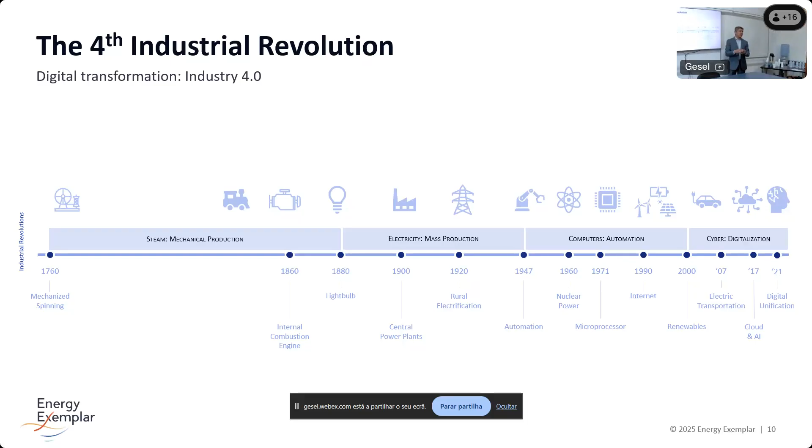Any country or any economy you go to today, most of the discussions are taking place around AI, cybersecurity and digital transformation. And electricity is at the core of all that transformation. So electricity is playing a major role in that.

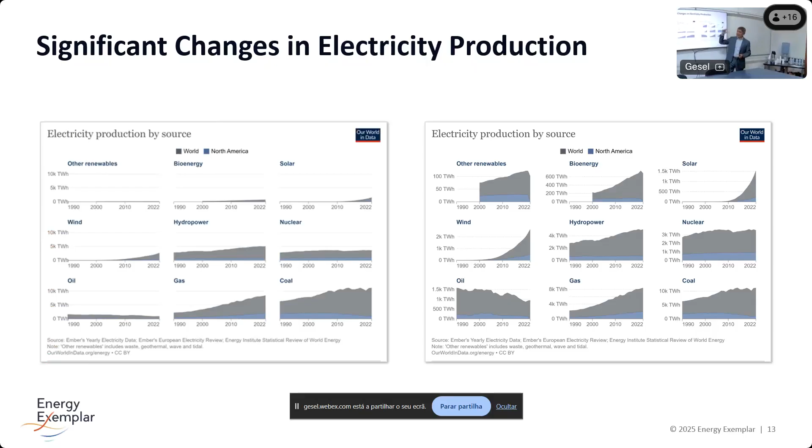And that's why every market that you go globally, people are considering what else do we need to do to accelerate the pace of transformation. And that's bringing major changes from a regulatory point of view, technology, and operations.

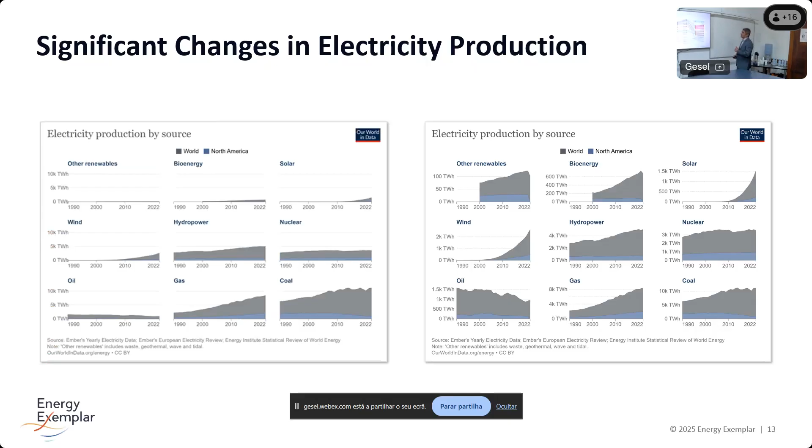So almost 90% of the energy that we use is wasted, either through heat losses and other kind of transformation changes. That's why the electrification makes a lot of sense if we want to improve the efficiency of the energy uses. But we can see how we waste a lot of energy.

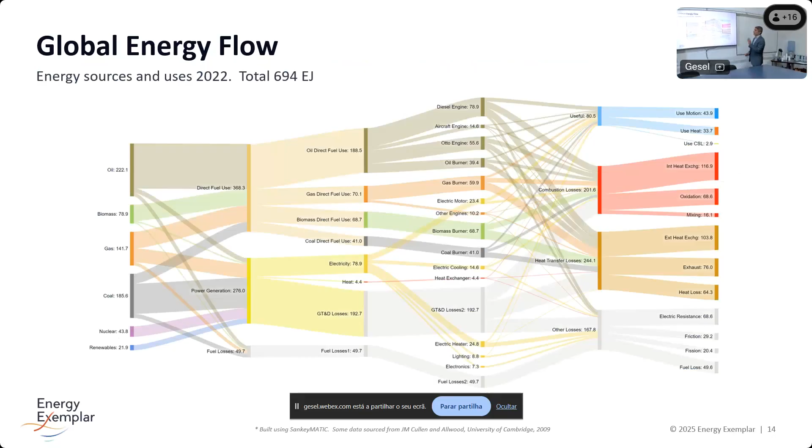So when we talk about energy transition, we need to not only consider that we want to decarbonize, we need to make sure that we make better use of the energy sources. What is the best and most optimal transformation that we can make of our energy sources in order to improve what we're currently doing?

So if you are in Europe, or you are in a Caribbean island or an island in the Southeast Pacific, this is a big issue for you. Energy security, you don't know where the energy is going to come from. If you are in North America, for example, electric reliability is the major impact in your system today, as well as the infrastructure for decarbonization. Transmission is the major issue today in North America.

If you go to other latitudes like Brazil, Colombia, Central America, other countries, extreme weather events are playing a major role in what we're doing, as well as regulatory changes and energy cost increases. So depending on your region, it will have more or less of these consequences.

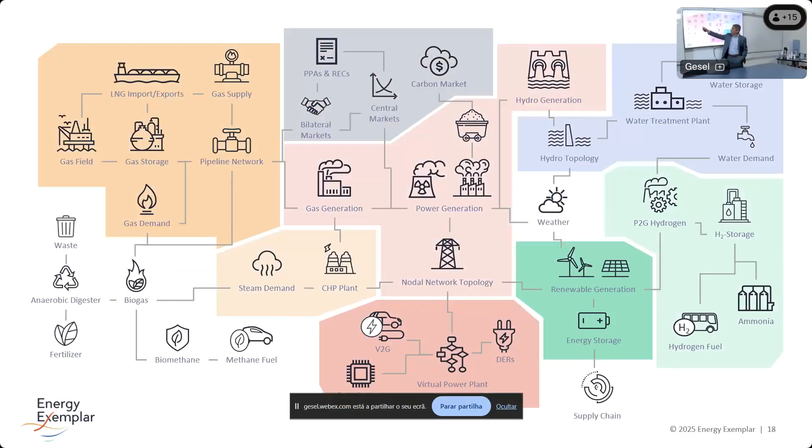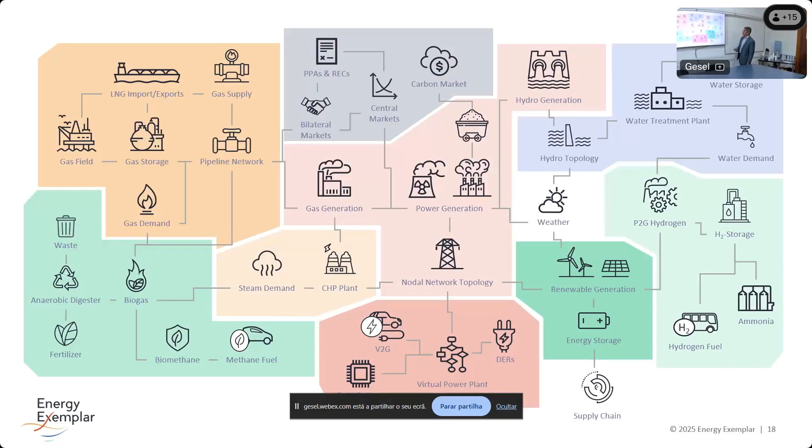So when we mean multi-commodity, we truly mean that. Not only, for example, when we say gas as a source for power generation, but modeling the entire gas supply from exploration to transportation to pipelines to storage to gas demand. When we talk about electricity, it's all forms of electricity. When we talk about hydro, it's not just hydro for generation, but hydro as an aqueduct system, irrigation, different kinds of water treatment plants, complete hydro topology to be able to model your hydro energy and so forth. Hydrogen with all its components and intrinsic modeling with the rest of the system, renewable projects, energy storage, and hybrid projects that you can configure in PLEXOS, including things like supply chain.

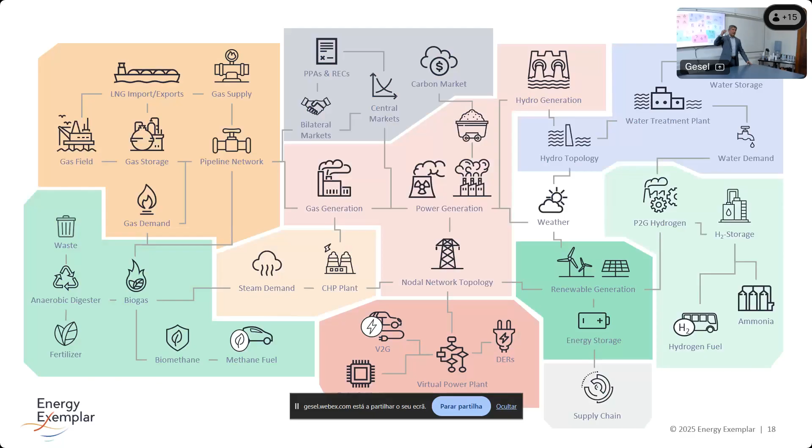In North America, and I know this is true in many parts of the world, today you cannot file an expansion plan if you haven't secured your supply chain. Supply chain also has an important component in that, depending on where the materials and assets come from, the country of origin, you may or may not have certain tariffs and certain incentives. So if you're going to put a solar panel in, but most of the components come from China, then you're going to have heavy tariffs and your risk is pretty high.

But if the components come from another country, then you're probably going to get an incentive to buy from there. So when people are doing the modeling, PLEXOS not only allows them to understand whether this is the best electric or energy project to put in the market, it's also looking at the supply chain and saying, hold on a second, if you buy from these sources or these countries, you're going to have these challenges and these risks. That's the kind of thing PLEXOS can do for you. So you can model all these elements together or separate, whichever you want.

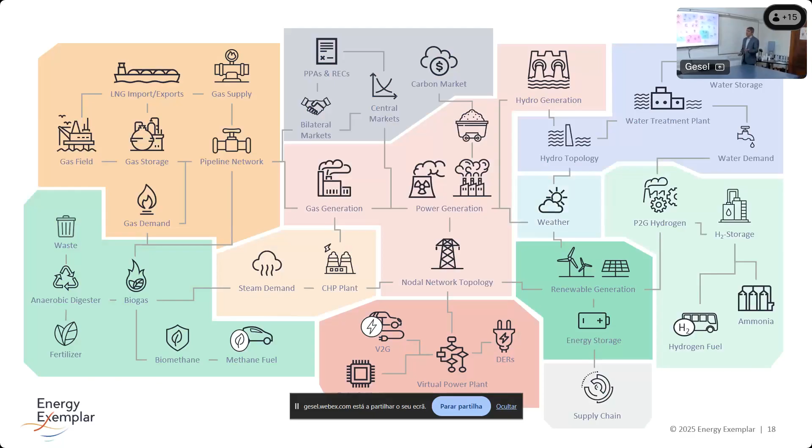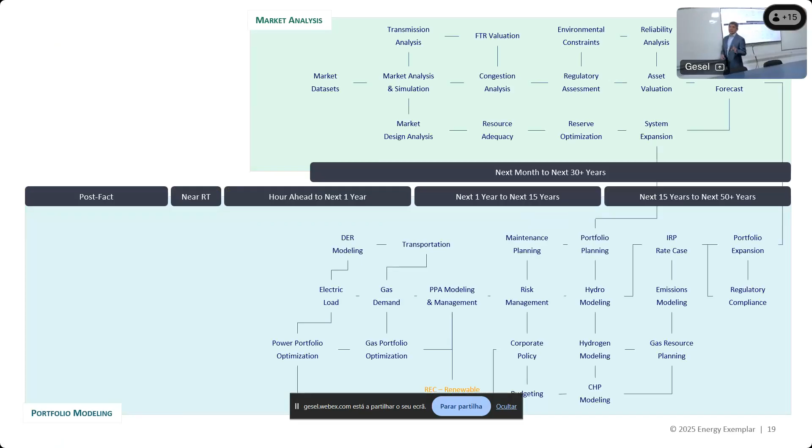And last, I'm not going to go through the details of this slide, but we can certainly schedule a follow-up time to go over this. This is an example of the different use cases people have for PLEXOS globally. Obviously, depending on the region, territory, and market, they may or may not do all of these things. But one, you can use PLEXOS to do market analysis.

So you can use PLEXOS to say, I want to see what's going to happen in Brazil. If this nuclear power plant is repowered and they increase capacity by 10%, what's going to be the impact on prices? What's going to be the impact on transmission congestion? What's going to be the impact on reliability and so forth? If this hydro project has, for example, bad hydrology or inflows over the next two years, what's going to be the impact on prices, on reliability, on reserves? If the government brings up certain regulatory changes, what's going to be the impact? So you can use PLEXOS to do an analysis of the Brazilian market.

But then you can also use PLEXOS to do your own portfolio analysis. So if you have your own assets, how much do I need to build in the future, and where, and when do I need to build that? What kind of risk policies do I need to put in place to manage my risk, to comply with all my corporate policies, to produce the budget I need to send to upper management, to do maintenance planning, to do PPA modeling, to be able to then, in the shorter term, engage into trading, into optimization of your gas and electric system, bidding into the market. So if you get closer to next day, next hour, next 5 minutes, how do I bid into the market? Then how do I communicate with the market operator?

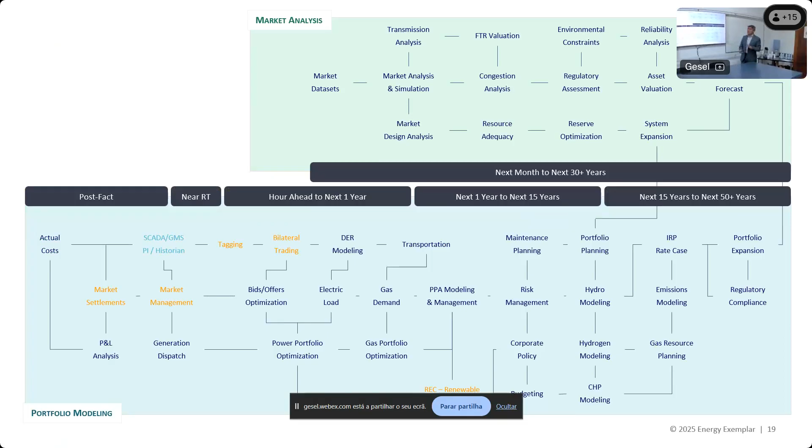And then after the fact, how did we do? So we say this is what we were going to do, and now I want to know how did we do? Did we do well? Did we do bad? So you can do all these use cases within PLEXOS. You can do market analysis in PLEXOS for an entire market or region, and you can also use PLEXOS to model your own portfolio. Same product, but just different configuration that you can do.

And I think this is the last slide. You will see detailed information from Felipe in just about 10 seconds, and you will see that he goes through different user interfaces.

At some point you're going to say, hold on, I thought PLEXOS was one product, but I'm seeing Excel, a web page, and an application that looks like a desktop application. I'm seeing different things, why? Well, the planning process is not linear, done by a single individual. It includes people managing data, analysts developing scenarios, heavy modelers building models in PLEXOS that execute them, business analysts looking at results, middle management doing collaboration and vetting analysis, and higher-ups doing decision making. Each persona has different perspectives and different ways of working with the data.

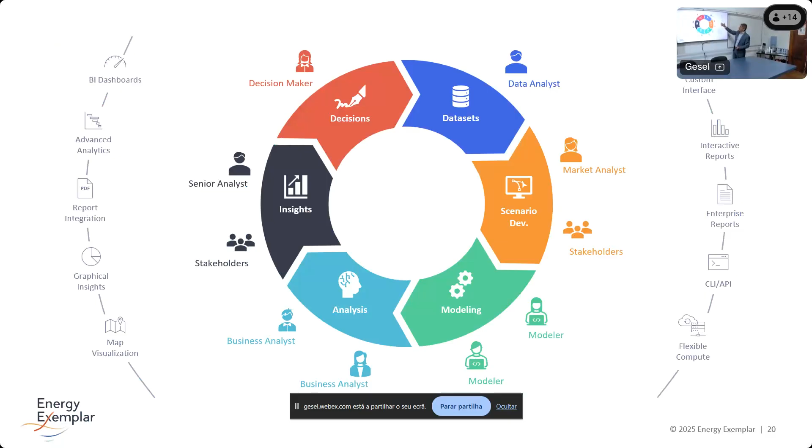You may have people who work better with Microsoft Excel, so you develop an interface on Excel for them. Others work better with command windows and code. Others just want to see BI reports, PDF reports, graphical insights, or mapping visualization. So depending on your role type and what you're doing, you may have different visualizations, and PLEXOS allows you to do that.

Even though it's the same product, you can run PLEXOS from Excel. If you don't like the PLEXOS user interface, you can just use Excel. We have a connector that connects to Excel, and you can query data, manipulate data, and run PLEXOS from Excel. If you prefer the web interface, you can do that. If you want to work off your laptop, you can use the desktop. So it's the same product, same everything, but different visualization depending on your role type.

With that, if there are any questions, please let me know. Otherwise, I think we can get into the meat of the content with Felipe, who is going to give us great insights into PLEXOS. I'll turn it over to you, Felipe.

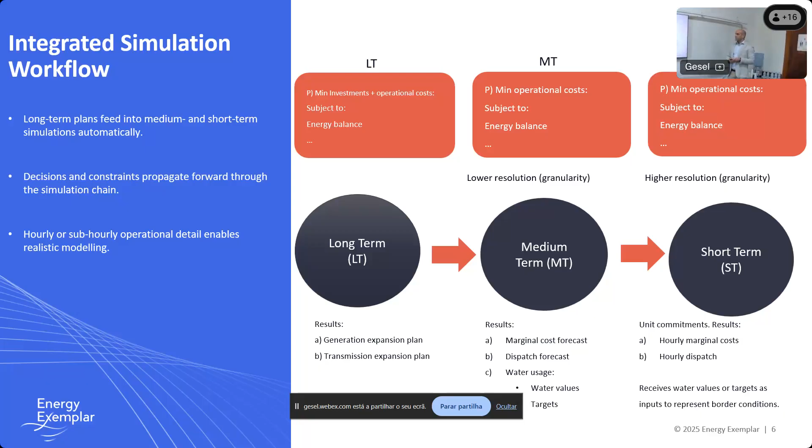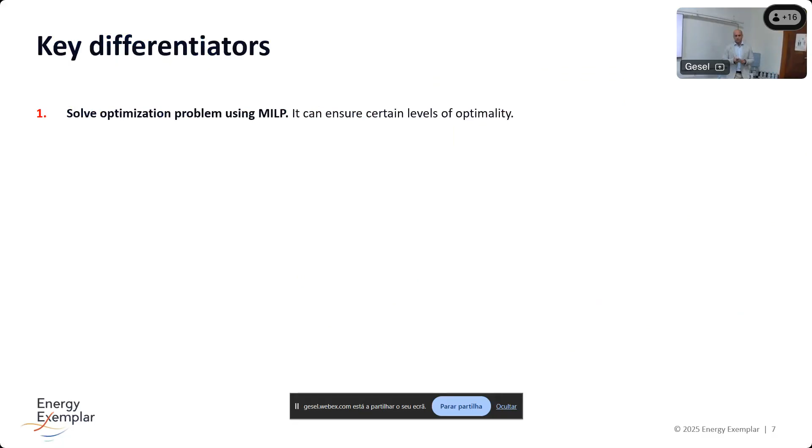A key differentiator of PLEXOS: we use a mathematical method to do this, so we can ensure some degree of optimality. Number two, we co-optimize the problem—you'll see this a lot in our presentations. Co-optimization means in the same optimization problem we solve, for example, reserve and energy, transmission and generation together, so we ensure it's optimal. We don't have the chicken-or-egg problem of which comes first, because we solve the same problem.

Number three is granularity, so we can go from blocks to hour or sub-hour. The reserve modeling can go very deep here—in fact we have a lot of users modeling AGC, primary and secondary reserve, things like that.

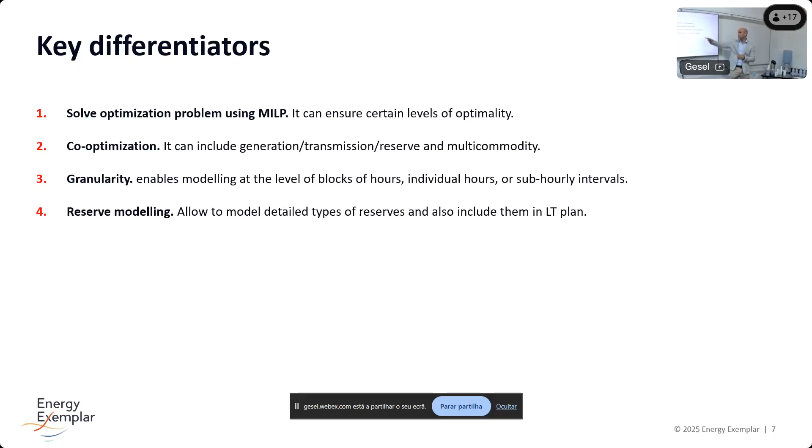Number five, a single engine for all the phases. Number six, we support regional, zonal, and nodal modeling. For nodal, this is very important for markets that have 1,000 nodes.

We have clients using PLEXOS for markets with more than 30,000 nodes. In Latin America our markets are usually less than 1,000 nodes, but in North America, for example, they talk about more than 30,000 nodes. So there's a lot of mathematical methods to simplify the optimal power flow, to make the problem feasible and solvable, especially when you include transmission losses, which is very difficult to model because that's a quadratic problem. How can you simplify that in an optimization problem?

So in those markets, they sometimes use the zonal model a lot—instead of modeling the complete network, you simplify it into one zone.

Number 7 is stochastic optimization. So we can do a scenario analysis, which is perfect foresight, Monte Carlo, which is also perfect foresight. And we have also stochastic optimization. We have 2-stage and multi-stage stochastic optimization. Number 8, we can go a mixed temporal resolution, which means in the same problem, you can do very high detail at the beginning, and in the future, maybe you can reduce, you can use blocks. Why we do that? To speed up the problem, to make this faster.

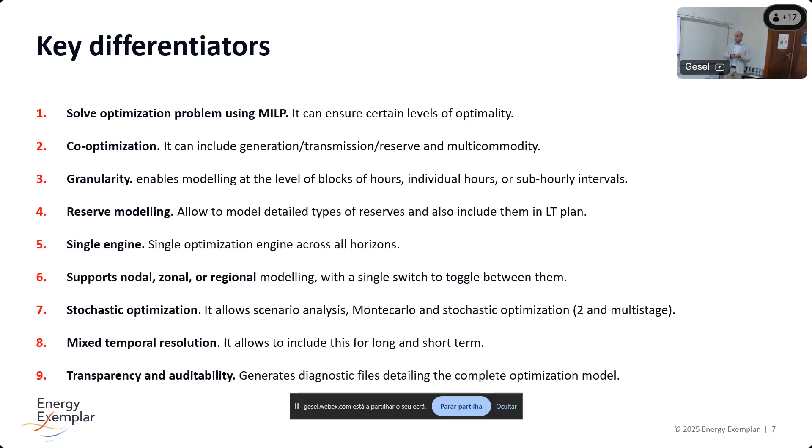So PLEXOS was born as desktop, and in 2019 we added this into the cloud. So you go to the web page, you will see PLEXOS Cloud, and this is the word we use to name PLEXOS. So what are the benefits of this PLEXOS Cloud? Number 1 is a centralized storage in the web. So you have all your models, all your simulation history in the web page.

And this is important as well, the change management and versioning process, because when you work in desktop, you make changes, you save, and then it's not possible to go backwards. So you lose the tracking of the progress. With this, you can see who did the change. When you see the outputs, you can see what is the database linked to the output. So it is very important when you work in a large team. You can track the changes.

You can select the machine. As we go on the next slide, I will show you the machines you can select. We have a map reporting and congestion analysis to analyze where are the congestions. There is a lot of usage of this in nodal markets. In this market with 30,000 nodes, this concept is used a lot. We have Power BI, I will show you some screenshots about this, and Excel add-ins, so you can download this to Excel and then you can use Excel to process the outputs.

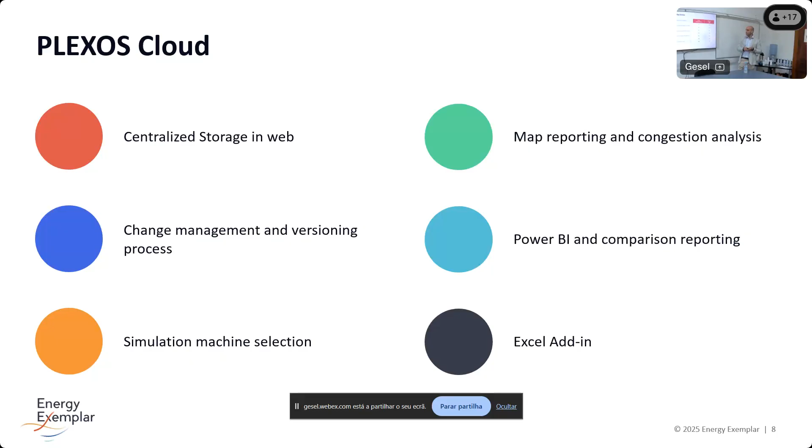So for machine, these are the machines available at the moment. So you can go with a very low spec machine, like 2 cores and 16 RAM, to a very large one. So you have plenty of options. And of course, it's more expensive than this one. So you have a concept of credits. So you consume credits when you use PLEXOS Cloud. There is a question.

So where do we get data for power system data? We don't. No, we don't. We sell databases, but the databases are created from public sources. So, for example, we have a Chilean database. All data in the Chilean power system is public. So we have a database for Peru. Peru is public, so you can download data and then you can use your own database.

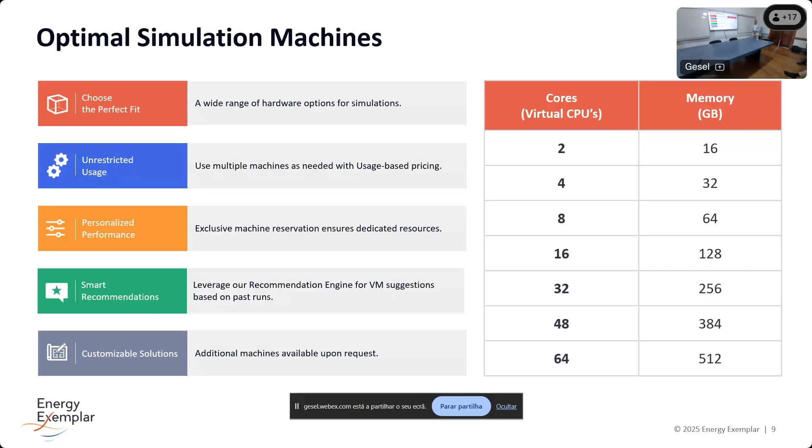Okay, so thank you. Right. So next, okay, this is the second part of the presentation. I will be talking now about the typical use cases. So the first one is expansion planning. I will use this one; the total is 13 for this presentation.

So expansion planning, which is this? You will see this a lot in academic papers. You will see this representation of capacity expansion planning to explain what we do with this chart. Which means if you invest a lot in assets, you will have a higher capital cost and lower production cost, but we try to minimize the net present value of the sum of both.

So this is the total cost, and we try to minimize the net present value, as I said. So what are the features? All the features here about what you can include in the model. So you can include any type of generation technologies, batteries, generation contracts, and so on. You have a lot of options including this type of exercise. In the US, this exercise is called IRP, Integrated Resource Planning. And there's a lot of PLEXOS clients using this space for this type of studies.

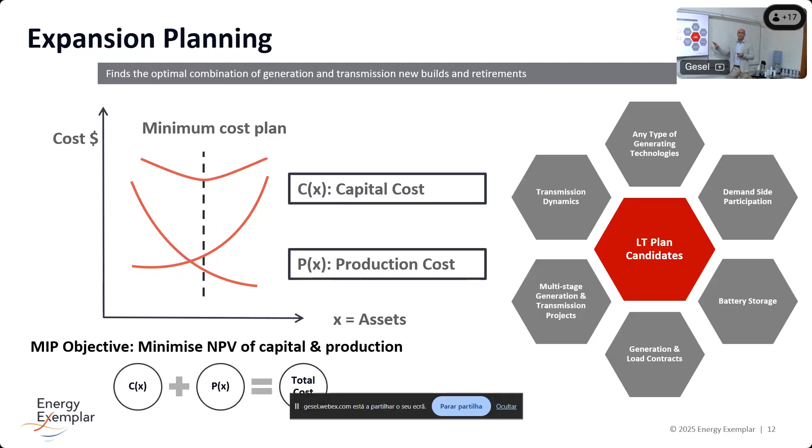And then the main output you can see in the chart here: PLEXOS answers what to build. So here you see, maybe you cannot see at the back, but blue is hydro, orange is gas, green is wind, and yellow is solar. So you can see the investments year by year. So we are trying to answer here when to build, what year, and what type of technology. So we can make sure that it's optimal for the input data.

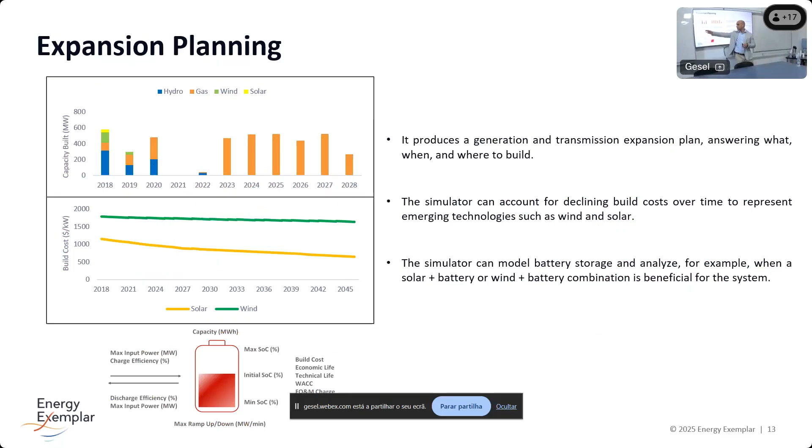Then you can include variable build costs. So in this case, this is an exercise of 2018, but I try to represent the decreasing of the build cost for solar and wind. You can include batteries as well in this type of exercise. So this is number one, expansion planning.

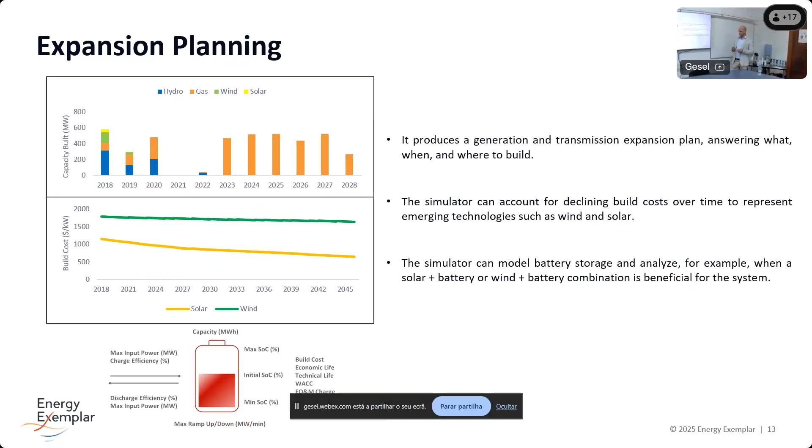So when I told you we have a congestion analysis tool, we try to put in a nice viewer in the cloud how to calculate the congestion charges. In mathematical terms, the sum of energy charge plus congestion charge plus marginal loss charge gives you the total price. Then you can find the three components in the software. So you can report the flows, losses in lines, and all the dynamics of optimal power flow.

One thing, yes. Here in Brazil, we are at the moment discussing the models of pricing of the operation. Today we are by cost, and we are also discussing the offer model as in other countries, some markets in the USA. In this type of model, all the clients have their own models so that they can make the offers, the bids in that market. And how is the feedback of your clients using PLEXOS to compete in these markets?

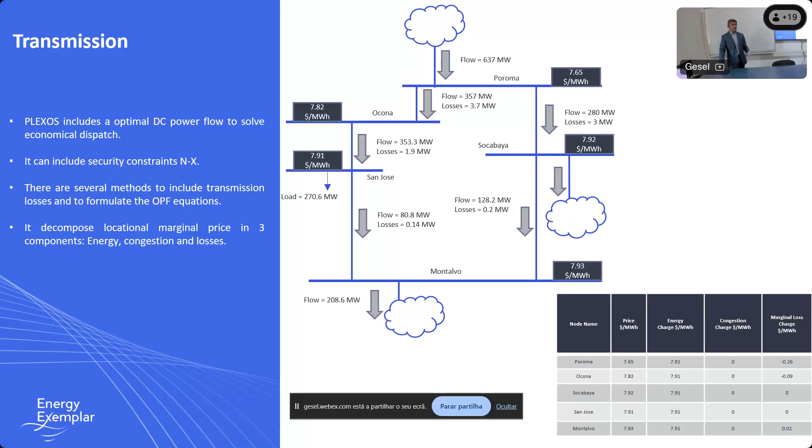So another thing I just remember: it depends on if they have capacity markets or they don't have capacity markets. In the case of the Australian markets, they don't have capacity markets. They don't offer the variable cost. They need to recover something. So people know how much they raise the price above the cost. It's called markup. So they know, oh, these guys bid 3% higher than the variable cost. That is because they need to recover the fixed cost, because they don't have capacity markets.

There's another way. Also, there's a property called markup. So you can input the variable cost and see, okay, let's see what happens if they do a markup of 3% above the variable cost.

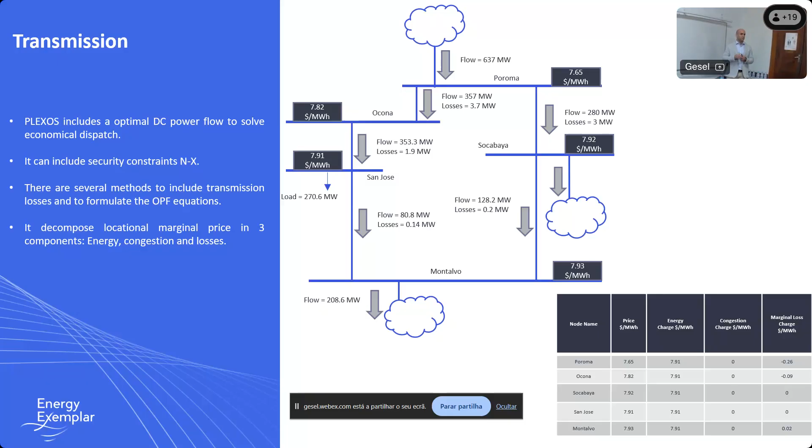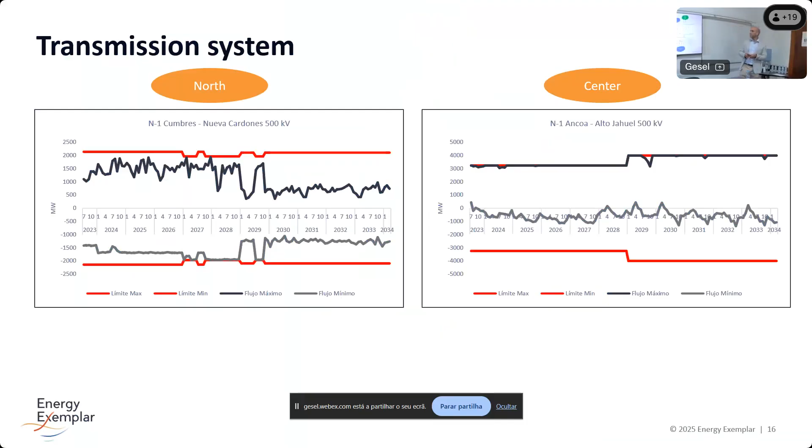And then you can model security constraints, which are very important, because if you have two lines here, this is 3,000, 3,000, it's not possible to send 6,000. So you have n-1. And it's important when you have mesh networks, because we have shift factors. So these limits here are not just the total capacity divided by 2. You have a mesh network. So these constraints are calculated by another software, electrical software, and then you can input the limits in the software.

One important thing is PLEXOS only models active power. We don't include reactive power. It is important because the mathematical problem simplifies a lot. In mathematical terms, it's called DC power flow. In DC power flow, you assume three things. You assume the reactance is higher than the resistance. You assume the angle difference between buses is very small. And you assume the voltage in the buses is 1 per unit. Then you simplify a lot of terms in the nonlinear equations, and you get a linear problem. That's why you can solve a lot of cases using DC power flow. And if you do that, you only model active power. You are not modeling reactive.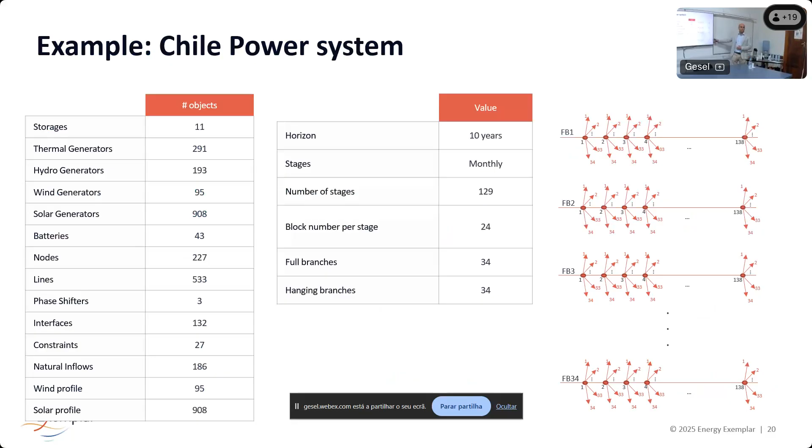And if you include this amount of objects, which is typical for LATAM markets, I have the nodes here. So it's 227, 500 lines. The mathematical size is monthly, 10 years, and we open the branches 34 times per month. So you can model that with PLEXOS. You can use two methodologies. One is called rolling horizon, another one is SDDP. And then you can get a price forecast.

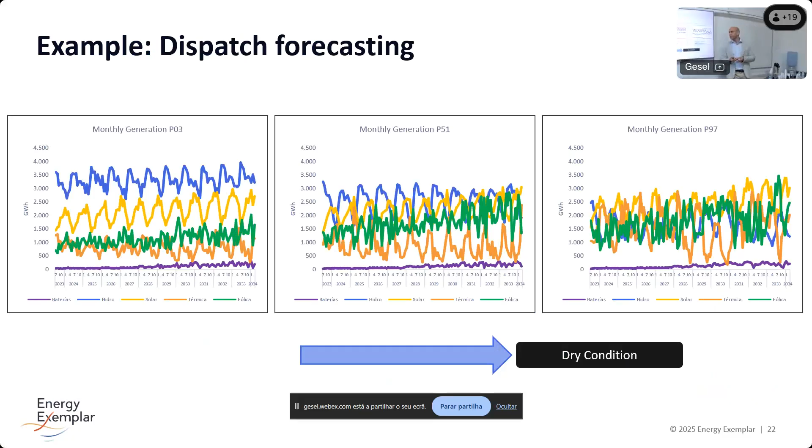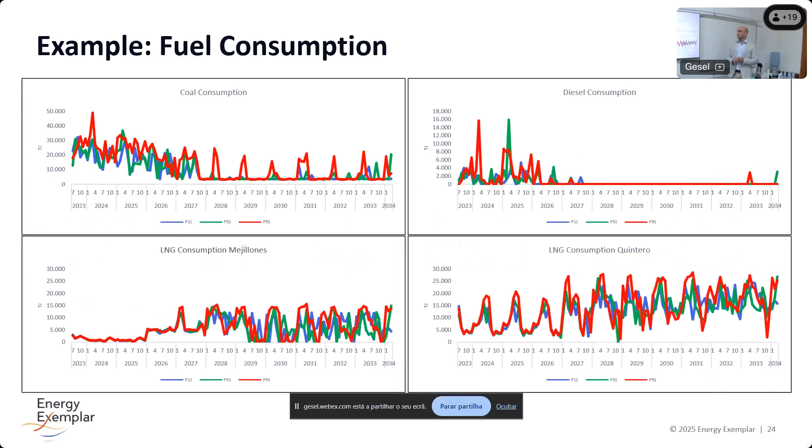And this is something we would like to show you in Brazil. So you can model short-term and long-term. This is an example of hour by hour in 1 week, 6 days. You can check that this is the dispatch. And I grouped this in technologies, and I'm showing you colors. So this is Chile in October 2025. So it's a real case. In Chile, they use PLEXOS for short-term.

So you can see there are a lot of challenges in this system. There is a huge solar penetration. Peak load is about 12,000, and there is a lot of solar during the day, and at night it's nothing. So how do you fill that hole? We have batteries, but batteries are starting at sunset and then it's almost zero. So you need to replace it with thermal, with hydro, and hydro is not as flexible as one can think. Sometimes there are a lot of constraints, irrigation constraints, flow constraints, so it's not possible to ramp up and ramp down in one single day.

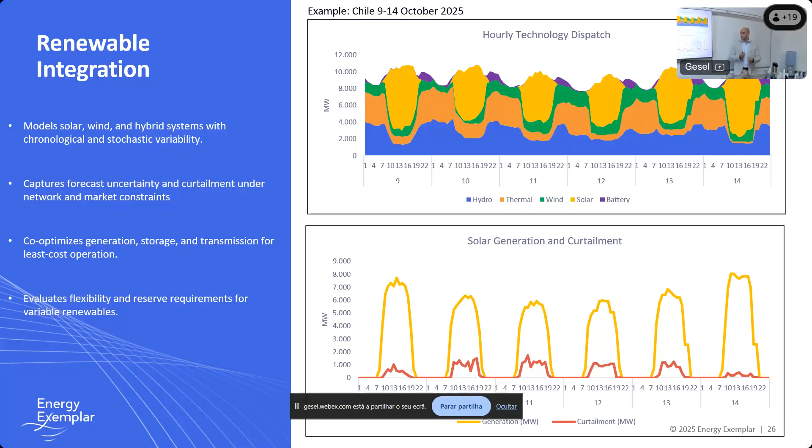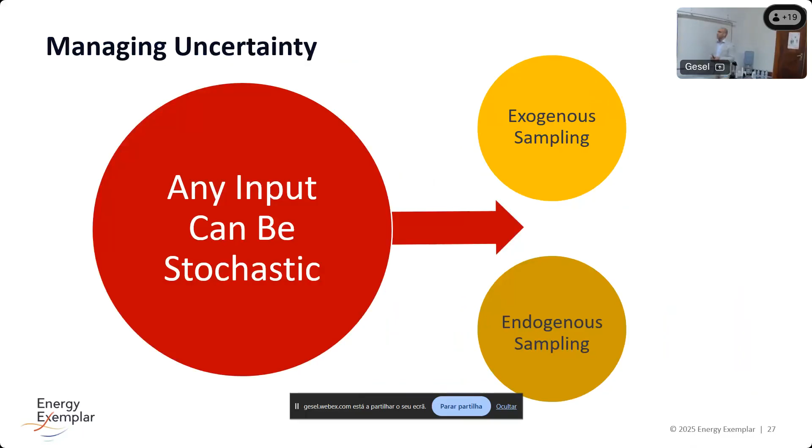Any input can be stochastic. You can read from a CSV. You can create from PLEXOS. It's an example of an ARIMA model I fitted in Peru.

It's very important to put the correlation between variables, because we can see here that if this mean is low, the gray one, the black one is also low. So you need to input the correlation. You also need to capture the temporal correlation and the spatial correlation. If they're close to each other, we need to model that. We need to capture that, and we have a correlation matrix to include that if you want to model an endogenous. You can read from a CSV as well.

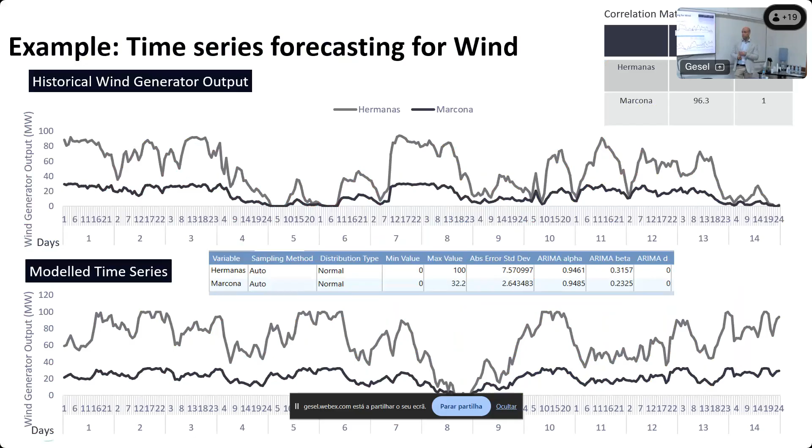Storage optimization, and I will be quick on this because we only have 20 minutes. We can model batteries, and batteries are not just storage. You can model efficiencies, ramps, max input power, minimum state of charge, and degradation. So if you use the battery, the capacity degrades.

Hydro storage, you can model pump storage. In fact, in the presentation I did at ONS, I presented a lot of use cases of our clients modeling pump storage in PLEXOS. One experience I can share is I worked with a client that was trying to assess if a pump storage was economically feasible in a country. They were using a software with blocks, and the net present value was very low, so they couldn't justify the investment. So they changed to hourly simulations, and they could get the signals to approve the project.

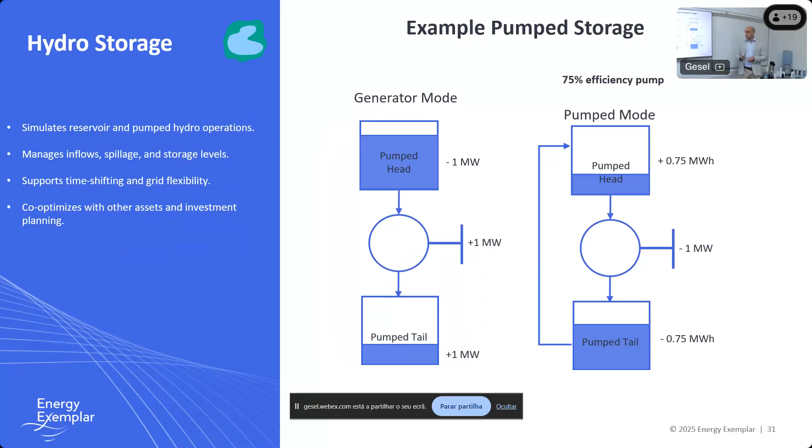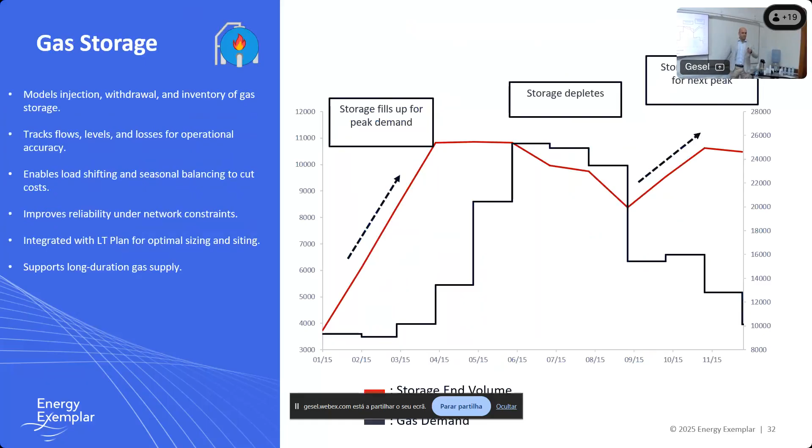We can model gas storages, and the resolution of gas storages is high. This is 1 year. This is the peak demand of gas, and then you fill up the gas storage and prepare for the peak demand periods. So this is used for peak shaving, and then you alleviate the congestion in the pipeline.

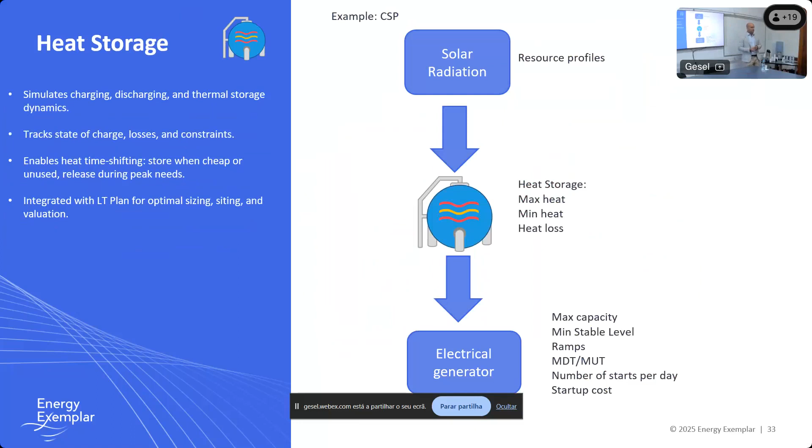Heat storage, this is the example of a CSP, concentrated solar power, where you put mirrors facing one large tower, you concentrate, you have heat, and you evaporate water. So you can model this process. You radiate solar into the CSP, and you can model max heat, min heat, and heat losses. You can also model all the unit commitment properties of the generator: stable level, ramps, min downtime, min uptime, number of starts per day, startup cost, all the complexities you can include in the model.

Water storage, because we have the water model. We don't have clients in Latam using this, but we have a lot of clients in the Middle East. Why in the Middle East? Because they need to desalinate water to consume. So for them, it's important to optimize electricity plus water. So they model these desalination power plants, and then they have water storage.

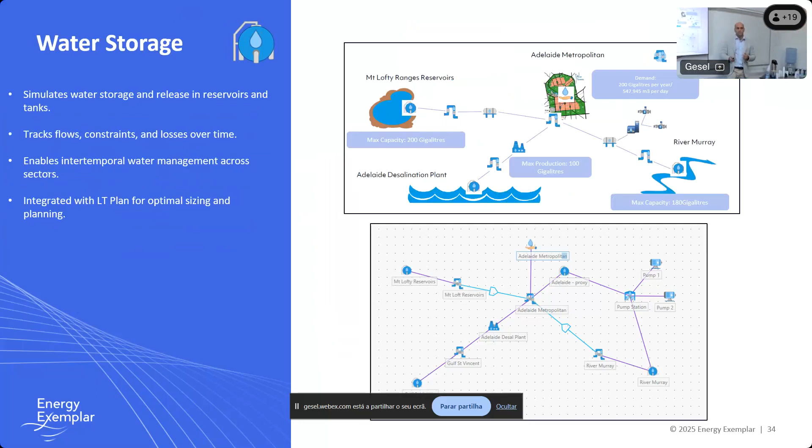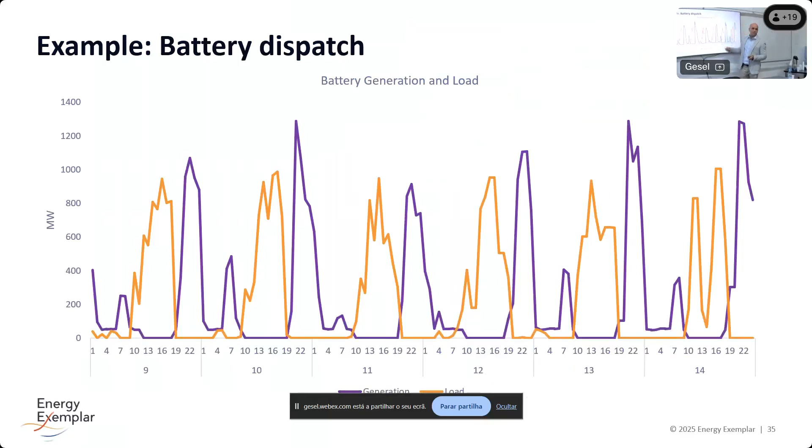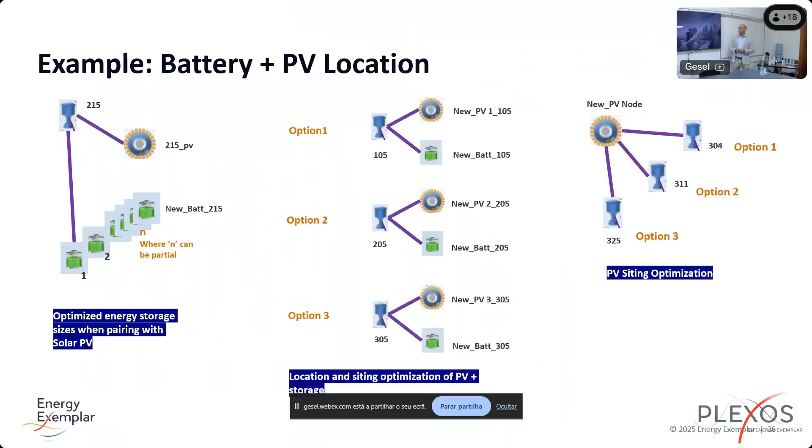Hydrogen. Well, hydrogen is a large topic for Europe. Our colleagues in Europe show this a lot, and they are working on several projects with hydrogen, and we have a model to model this.

And this is an example of one of the classes we have. It's called Power to X. So you have water, it's H2O, and you need to split that. Hydrogen is H2. How do you do this? With a process called electrolysis, and you consume electric power to drive the process. You can model this process using PLEXOS. What it's doing is absorbing power, then generating hydrogen, which you can store and then transport.

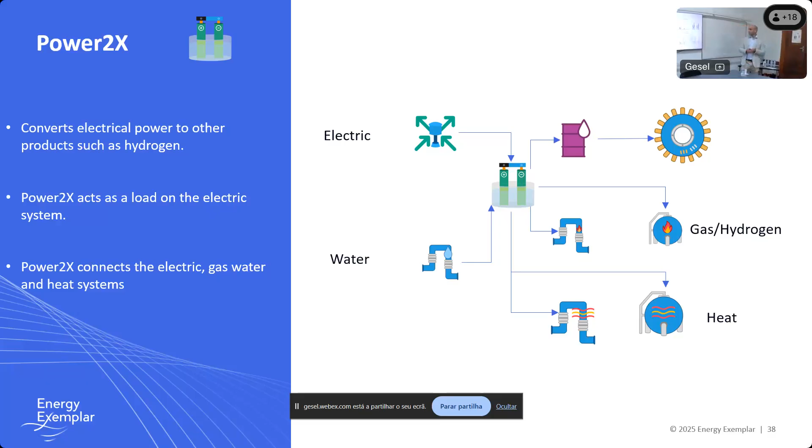And this is an investment case. You can use this type of analysis with the software. Imagine you don't have anything, you are on an island, a very remote island with a lot of wind—imagine 90% wind capacity—but it's very far from the network. So how do you invest in a project? Let's try to see what is the optimal combination of batteries, solar, and wind power plants.

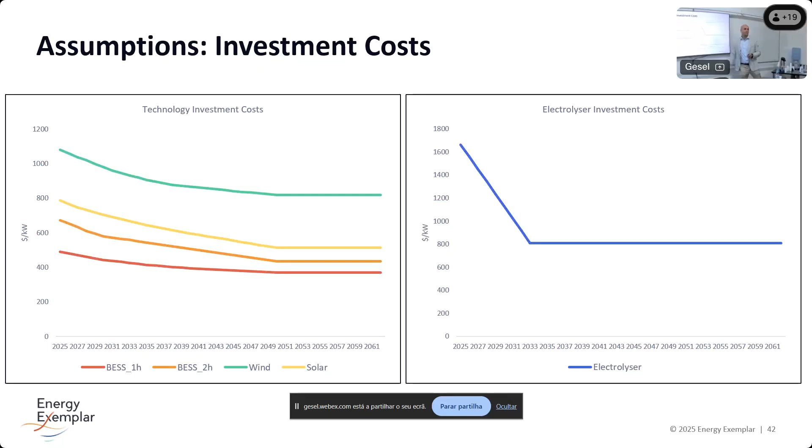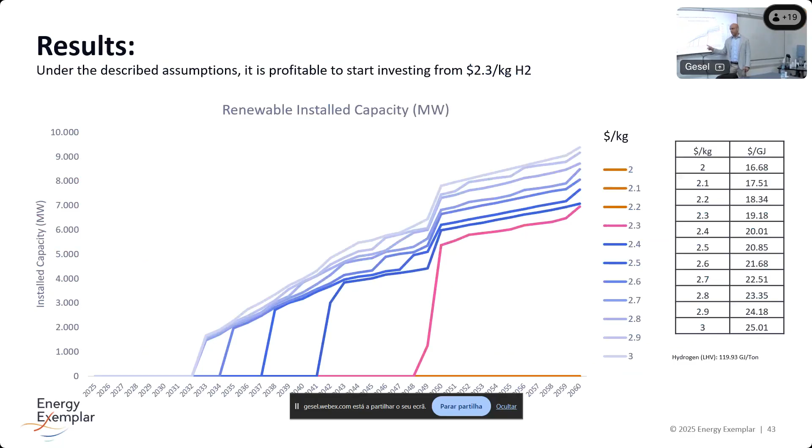Then I can find, well, let's see. So I see my breakeven for this example is $2.3 per kilogram of hydrogen. From 2048, I'm investing. If they pay me more for the hydrogen, the investment becomes profitable earlier—if they pay me like 2.9 or 3, it becomes profitable since 2032. So you can do this type of study.

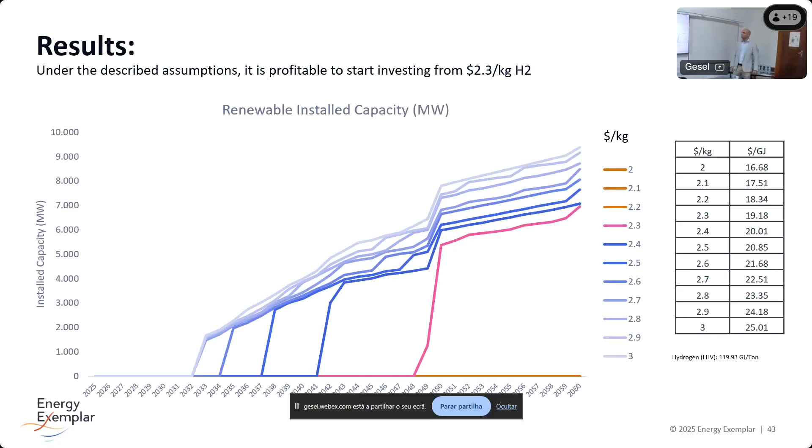And the results there, you can see the installed capacity and short-term bidding. So you know the unit commitment problem. The unit commitment problem—you can include minimum uptime, minimum stable level, minimum downtime, start costs, and then you can reflect all the inflexibilities of the thermal power plants.

We saw a lot of challenges in thermal power plants, thermal systems, when they add solar power plants, because of this cycling issue. What is cycling? It's when you have a lot of solar during the day, so the thermal unit needs to be completely off, and during the night, when you don't have solar, you need to turn it on. Then you need to repeat that every day. So thermal power plants were created and designed to operate at full capacity or off.

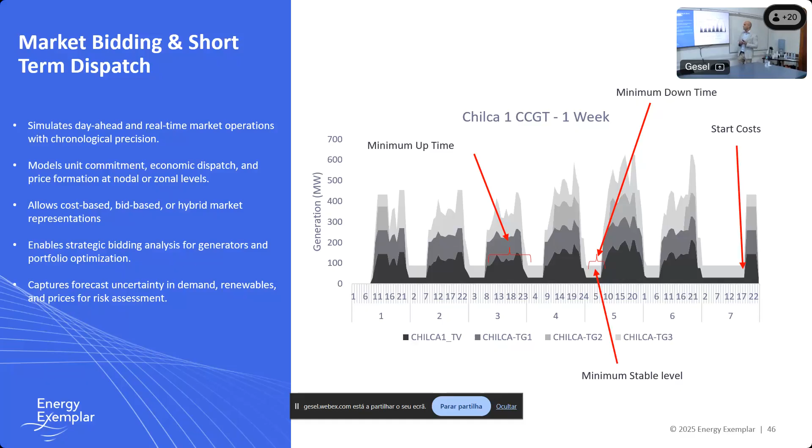So in a hydrothermal system, if you don't have water, you operate the thermal machines at full capacity for several days, then when you have hydro, they're off. And when you have solar, what happens is every day, turn on, turn off. So there is a lot of stress on the machines—sometimes they need maintenance, sometimes they break down. You can model this by changing the minimum uptime and the minimum stable level. We have some cases where it's not possible to shut down a thermal power plant, and you need to curtail solar power because of the minimum uptime and minimum stable level constraints. So it's very important to model unit commitment properties when you have this type of increasing renewable penetration.

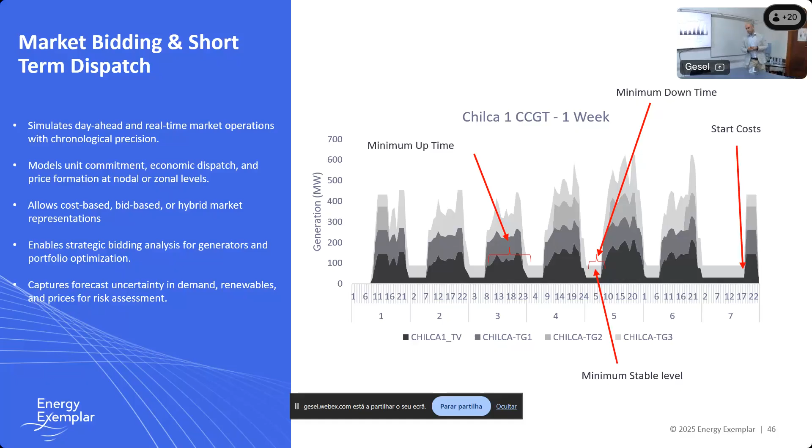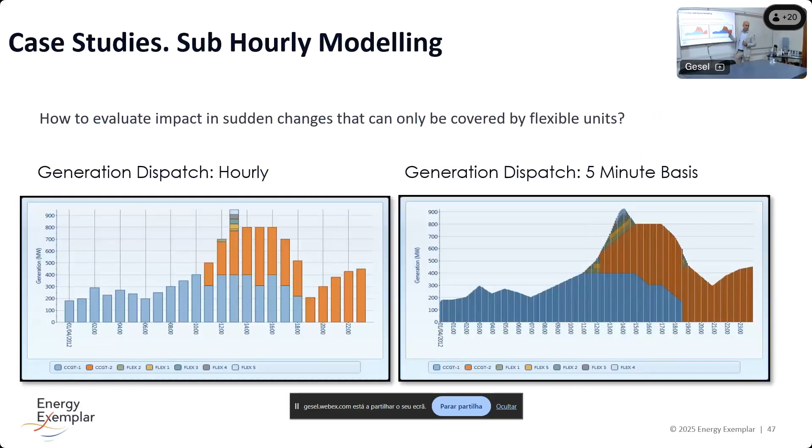You can go hourly and sub-hourly. This is a chart that's showing to you. Sometimes you also miss things using hour by hour. So if you use 5 minutes, you can see in detail what happened in some ramping periods to capture what is the benefit of the flexible unit.

On reserve, you can model any type, regulation, spinning, non-spinning, duration, risk, if it's static, a fixed megawatt, or dynamic, if it's depending on some parameter like demand, usually a percentage of demand.

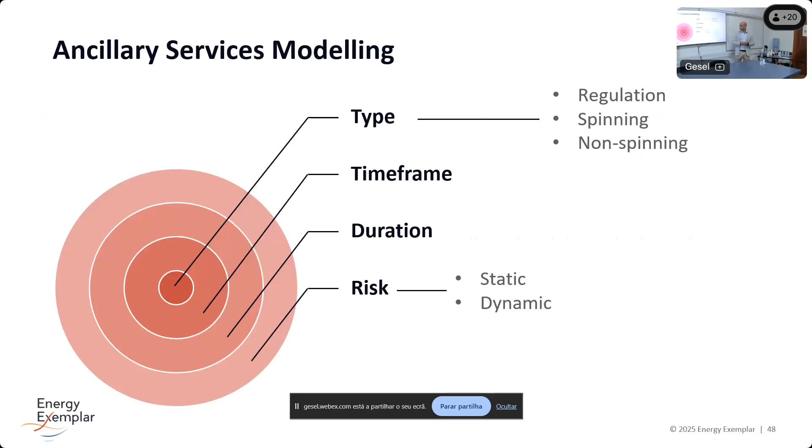Then this is the summary. So you get energy offers, you get reserve offers. You can mix them, like in the Chilean case, we have cost based for variable cost, bid information for reserves, the constraints, emission constraint, and we solve what is called security constrained unit commitment and economic dispatch, which in mathematics is just a mixed integer programming, and we get the outputs.

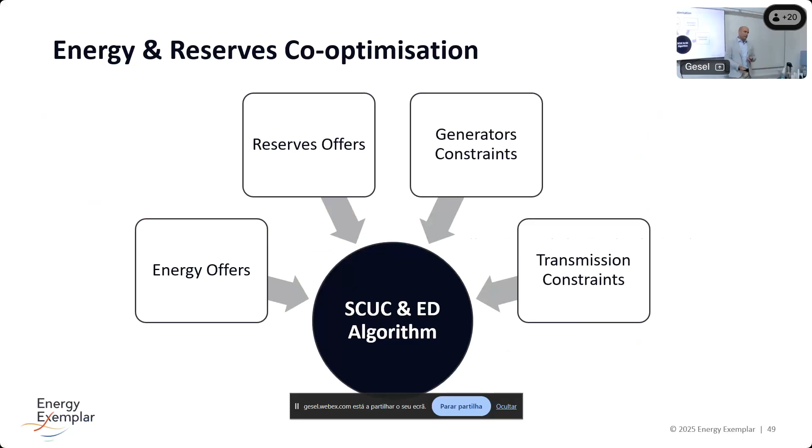So microgrids, you can model the entire small power system, and you can model the interchange between the grid and the dispatch on this.

So one typical case we have about this is data centers. Imagine one investor wants to place a data center, say 500 megawatts, and it has to be reliable 24/7. There's no grid, there's no grid capacity to supply it, so they need to invest in a portfolio. So the way to do this is you analyze this, you see how much grid is available, and then you have candidates, gas, wind, and then you can push it. You can do the software for them.

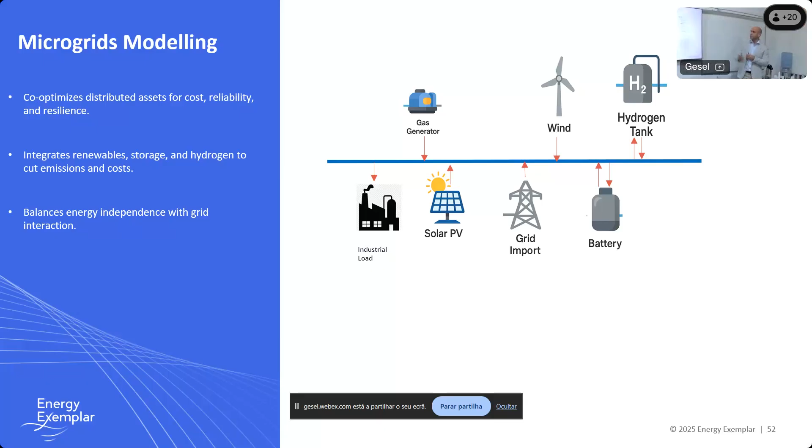And also you can find the optimal investment, the optimal capacity of each. It's very important because you are not modeling the entire market, you are just defining this for one single node. You can go hour by hour.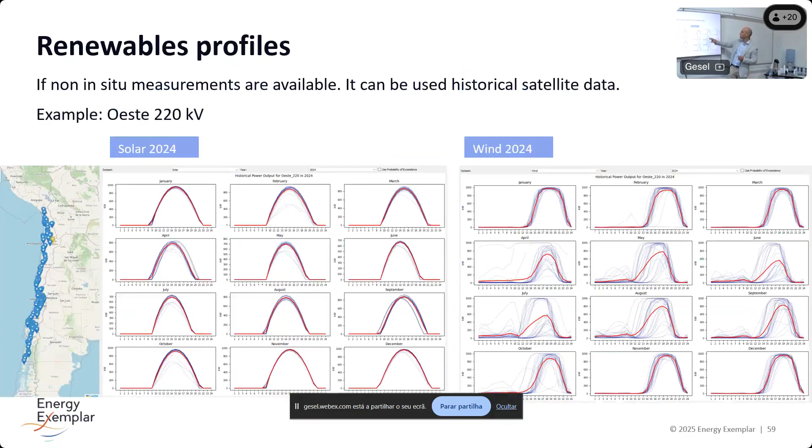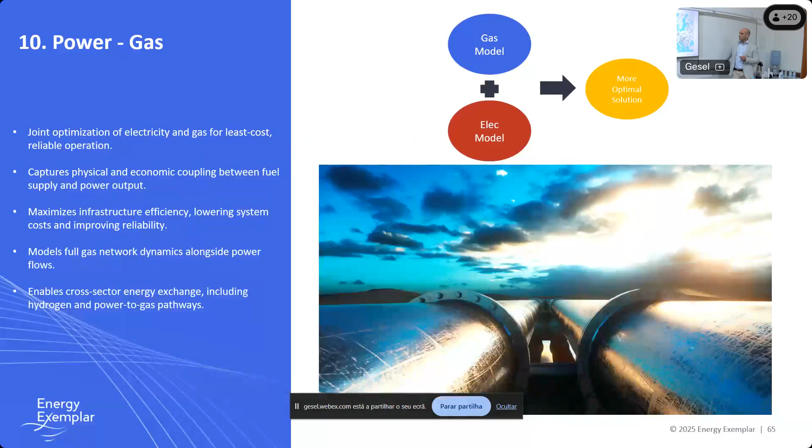Well, I don't have much time to cover the rest, but I want to stop here in this concept: short term and long term.

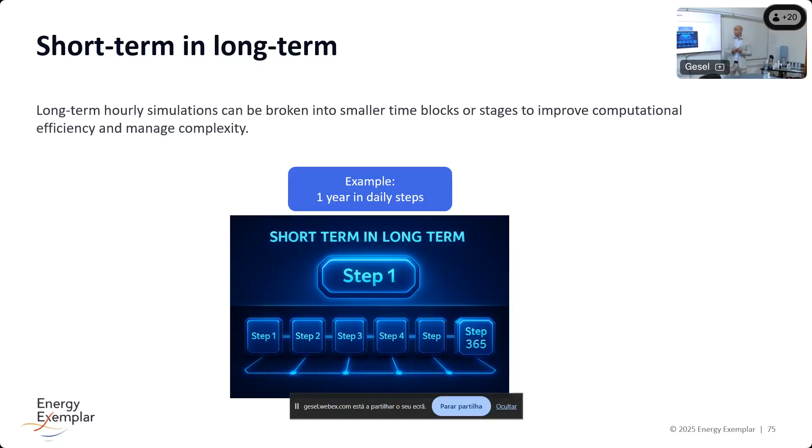Short term and long term is modeled in detail, hour by hour, the power system in the future. So how can you do this? It's not possible to solve the problem of the one-year problem in one step. So we solve this using steps. You have step 1, you solve the problem, the final conditions are passed as the initial conditions to step 2, and so on. You solve this in a sequential mode.

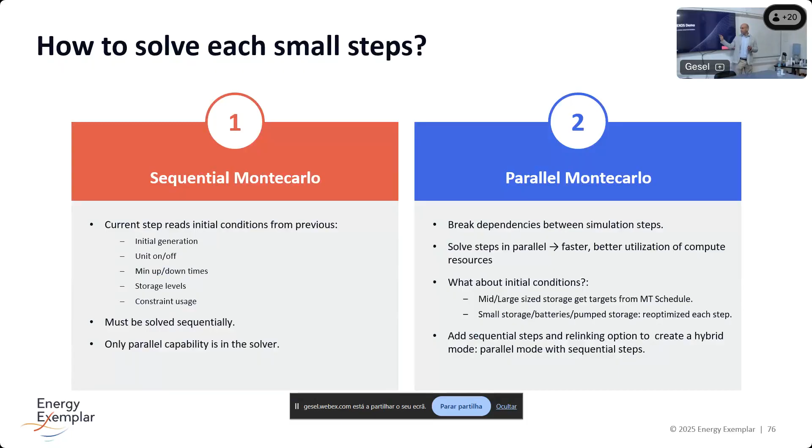Can be slow, yes, it can be, but also we have some options, which are summarized here. What I told you, the sequential Monte Carlo, but also we have a hybrid, the parallel Monte Carlo, and we have a hybrid which mixes the sequential and the parallel. I'm not going to explain all this because it will take one hour, but what I want to say here is it is possible to solve the hour by hour problem using steps, sequentially or in parallel.

In fact, most of our clients in the US, in these big networks, use hourly simulations, hour by hour, and they use sequential, parallel, and the hybrid option to capture all these things.

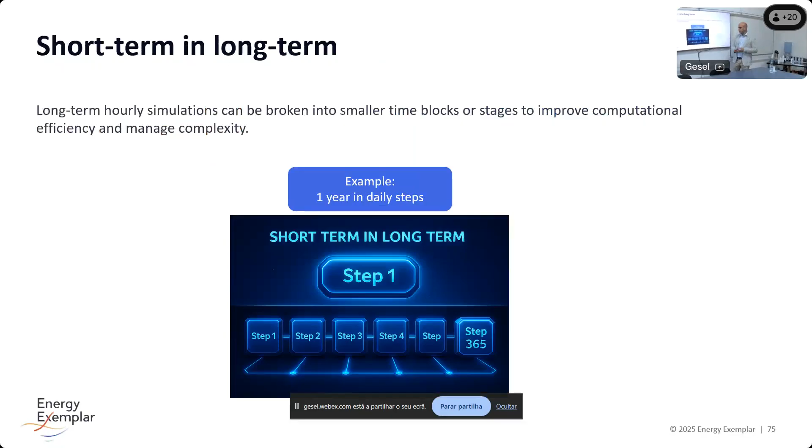And if you give me 4 more minutes, I want to illustrate this. This is an example of a small system. I want to illustrate the short term and the long term. I don't have PLEXOS Cloud here, but I have this in slides. So this is an IEEE 7 bus example. I put this on an island, which is an island in Chile, just to illustrate the size of the system and the flows.

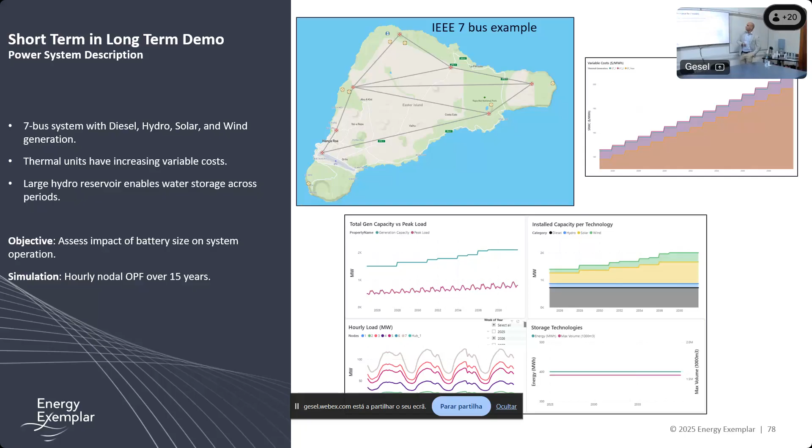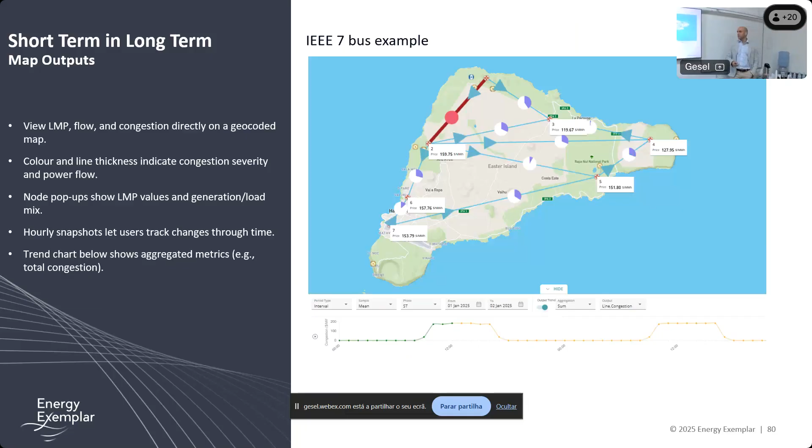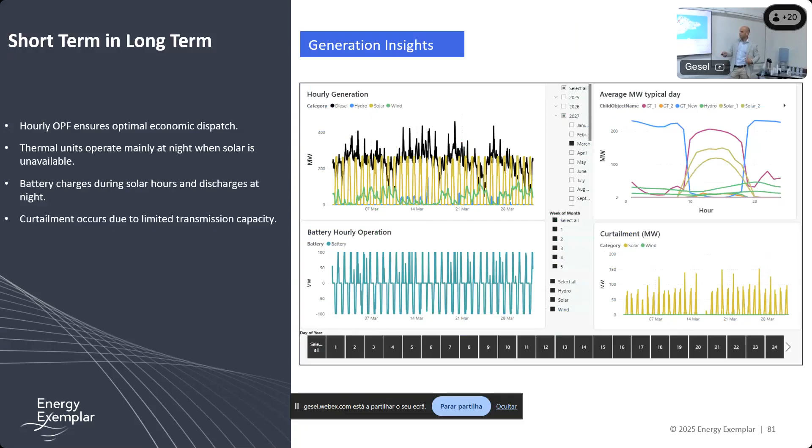I'm running 15 years, and I'm doing all the OPF. This is the nodal insights - this is the marginal price. You can see during the day it's 0, and then you go up, and so on.

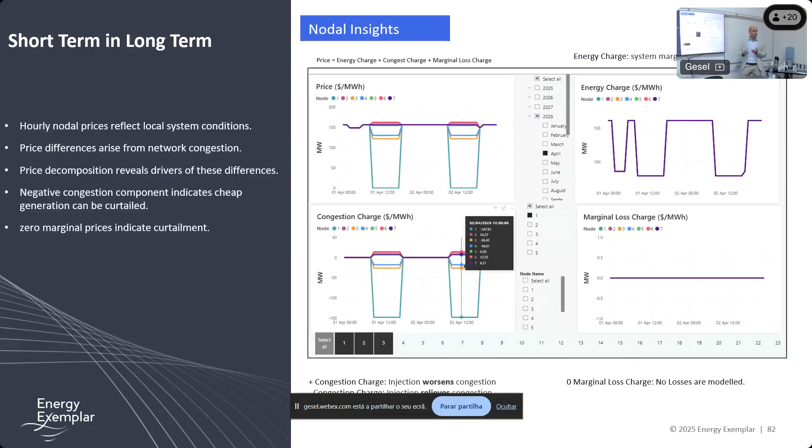You can also reproduce this for every hour over the 15 years. The line insights - this is the flow in one line, 4-5. You can see it's highly congested in some periods.

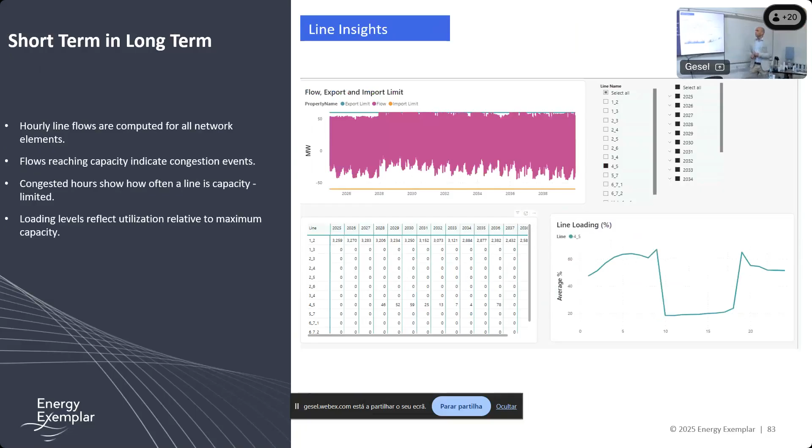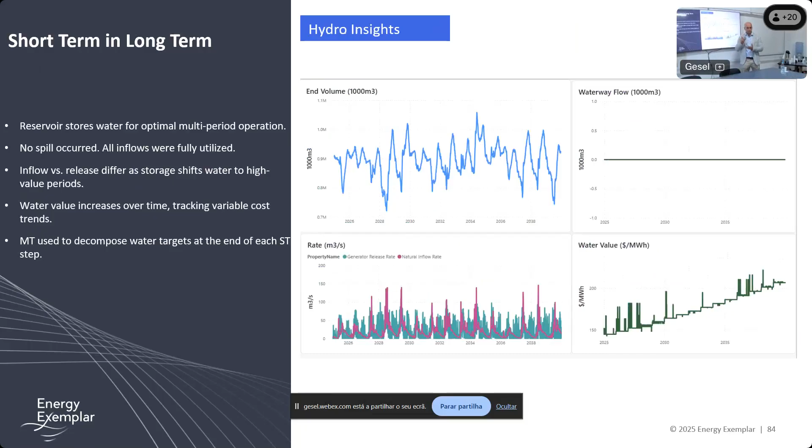And these are the hydro insights. So hydro, you can see that the natural inflow rate is in purple, and in light blue is the generator release. So you can see how hydro storage is balancing this - it's releasing hydro when you need it in the system.